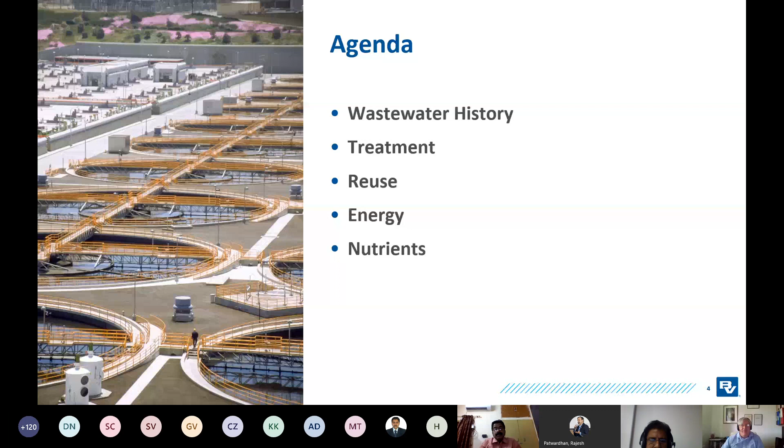So let's start off with that wastewater history. I know this history is biased, I'm telling it from the perspective of somebody sat at his home in the UK. If I was telling this story from America, India, or China, some of the facts I picked up might be a little different, but the fundamental basis would be very much the same. I think the growth of cities and international trade has got an awful lot to answer for in terms of human health. Bringing all those people together in one place is not only good for people, it's good for all the things that like to live off people as well.

In 1831-1832, cholera arrived in the UK on board ships. 32,000 people died in 1831-32, about 13,000 in London. At that time, the population of the UK was about a quarter of what it is now, so that's equivalent to over 120,000 people today - certainly more than the current epidemic.

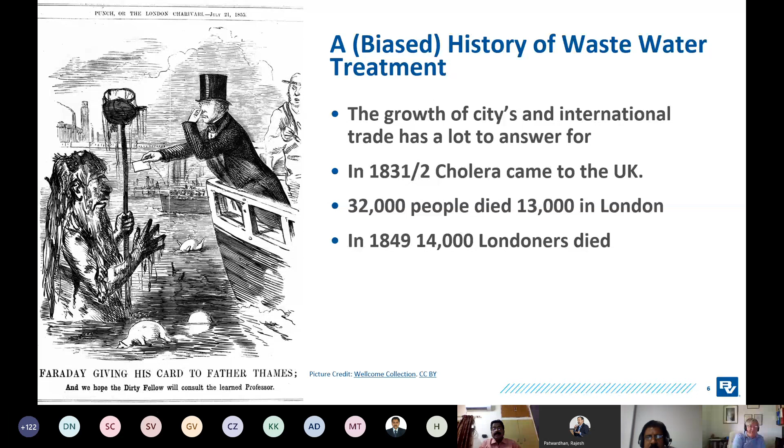Cholera came back again in 1849, and another 14,000 people died. At that time, people really had no idea where something like cholera was coming from. The whole of London stank. When people built the city, they regarded the river as pretty much a convenient place to throw anything they didn't know what to do with, including all the human waste. So we had a dreadful stink, or miasma, arising from it that people thought was what was making them ill.

In 1854, John Snow proved the link between water and cholera in a famous piece of work by looking at a pump in London, proving that all the people who'd become ill around it had drunk from the same water pump.

The first thing done to sort that out was by a guy called Bazalgette, and he solved the problem by building sewers. He built sewers through the centre of London and took the flow of wastewater out to the east of London, built some big tanks, and released it into the Thames on a falling tide, so it was taken out to sea. If any of you've been lucky enough to visit London and walk along the banks of the Thames, along the embankment looking into the river, what you're actually doing is walking along the top of Bazalgette's sewer.

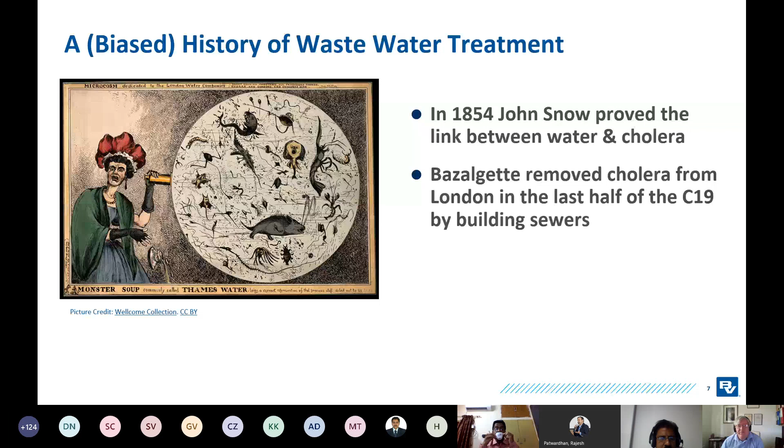So we talked about Bazalgette, who basically moved the stuff away and got rid of it on the falling tide. We moved on from there to start developing treatment. In the late 19th century, we saw the development of percolating filters. The document on the left is something I'm particularly proud of - in my office at work I have a series of original patents by Frank Candy, who was one of the proprietors of one of the companies that ultimately came together to form Black & Veatch. This is a patent for improvement in precipitation tanks and the means of delivering water to filter beds, so a direct link I have back to some of this original treatment work.

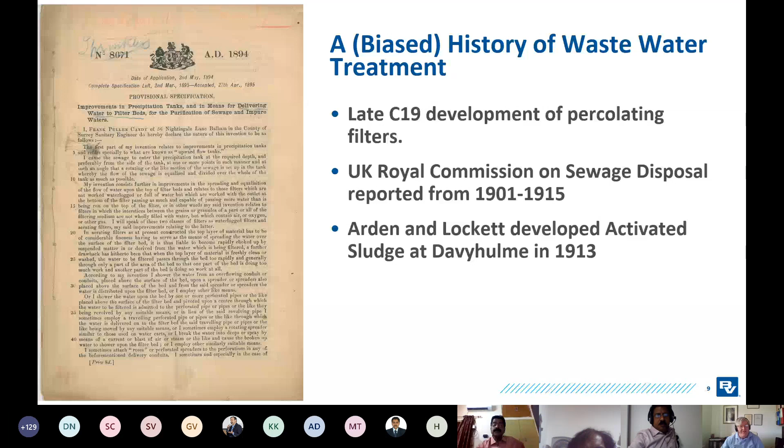At the same time as protecting human health, we've also been protecting the environment.

Moving a bit further forward in time, certainly this event was in my lifetime: the Cuyahoga River Fire of 1969. At that time, this is up in Cleveland, which is in the Rust Belt in the US, and there was a lot of industrial activity, a lot of oil floating on the river, and that occasionally caught fire. In 1969, this caught fire and grabbed national attention. This photograph appeared on the cover of Time magazine in 1969, and this was really part of the pressure that led to the formation of the US EPA and the passing of the Clean Water Act.

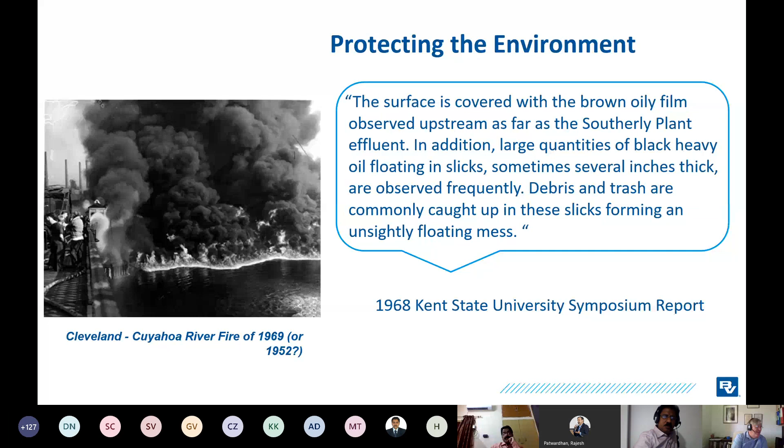One interesting side note on this is we all think fake news is a relatively new event, but when the fire took place in 1969, it was a fairly small event, and the local fire brigade had put it out before any of the press arrived. So some enterprising journalists dug back in the archives and found a photograph of the 1952 river fire, stuck that on the front of Time magazine, and that was what pushed it forward. Whether that's fake news or not, I'll let you decide.

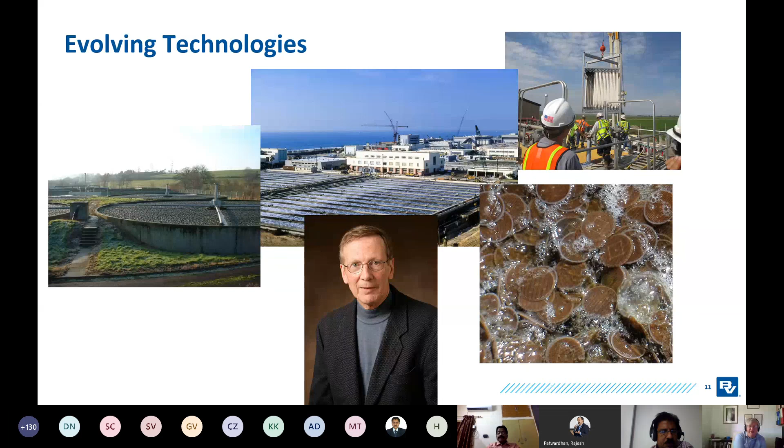So we set the basics nearly 100 years ago, but ever since then we've been evolving the technologies from trickling filters through activated sludge, things like MBRs, MBBRs. And I can't work for Black & Veatch and not also put in a plug for my good friend and colleague James Barnard. James invented biological phosphorus removal probably 50 years ago now. It's become a mainstay of treatment. He's still now 80 years old and still churning out amazing new ideas. A great pillar of our industry.

I thought I'd share with you a couple of recent innovations that Black & Veatch has been pleased to be a part of. The first one is enhanced biological phosphorus removal through sidestream biological phosphorus removal.

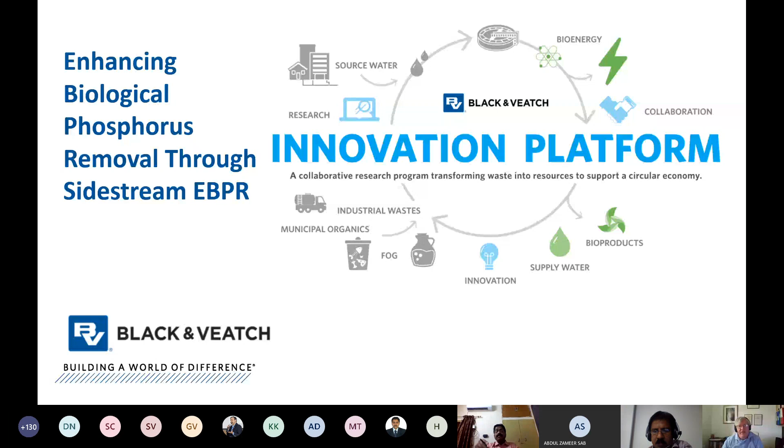Any of you who've been involved in biological phosphorus removal plants will have found that sometimes they work really well, and sometimes they can be really difficult to get going. Over the years we've been looking at this, and we discovered there are influent conditions that make biological phosphorus removal work well, and influent conditions that make it work badly, and that your influent can change over time. So you can have a plant that's working really well, and then you can have an industrial discharger in the catchment who shuts down, stops discharging, reduces the amount of VFA available in the influent, and the quality of your phosphorus removal will decrease. The other thing that's well known about biological phosphorus removal is it can be susceptible to wet weather events, so that if you get a storm event, it can wash your biomass through the system, and it takes quite a while for the plant to recover.

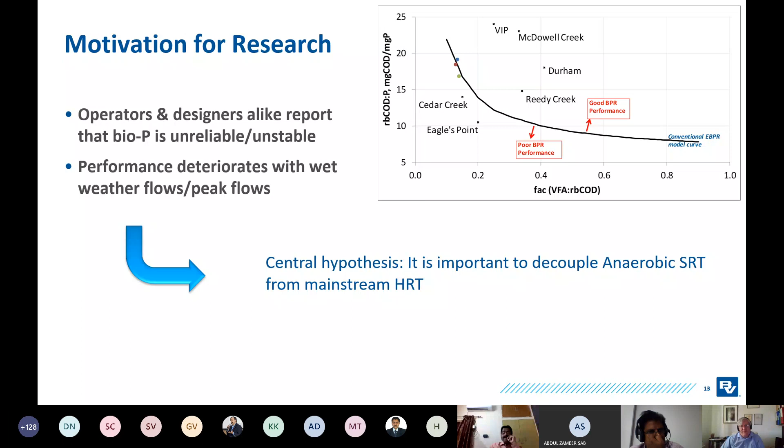So what James has been thinking in recent years is that if you can decouple your anaerobic sludge retention time from the mainstream hydraulic retention time, you get some significant improvements in performance. So the approach we're taking is to enhance fermentation in an anaerobic zone, targeting some really deep anaerobic conditions, ORPs of minus 300 millivolts, and limit the mixing energy. That's proved to be an interesting challenge for engineers who love to put mixers in and keep everything churned up and think they're doing a great job.

And also limit the flow of influent into the anaerobic zone. We've had success with this in really 3 different configurations. The first and simplest approach is to just turn off mixing in one section of a conventional BNR plant, so in one of the anaerobic zones, turn off the mixers for 23 hours a day. We do this, for example, at Henderson in Nevada.

And the plant's use of auxiliary chemical for phosphorus removal stopped almost overnight. The second way of doing it, which allows us to get the benefits of independence from peak flows, is to put a side stream fermenter in. So take a proportion of the flow that's going through the anaerobic zones, put that into a side stream fermenter. Again, deep anaerobic conditions, return that flow. Again, at Cedar Creek, we've done that and seen really good results.

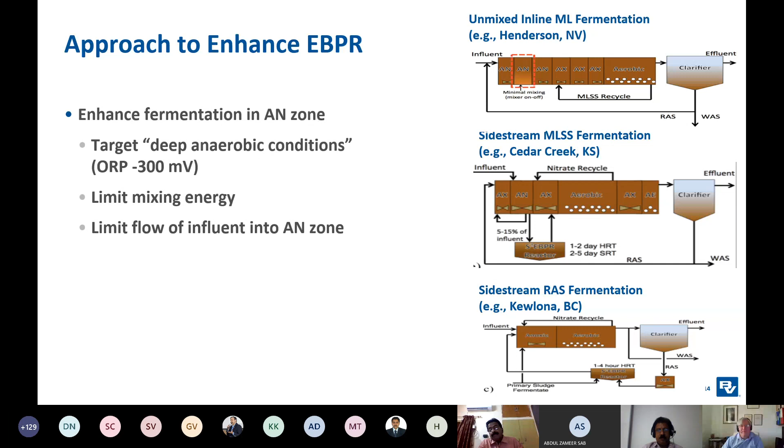So this is great, and we're looking to advance this in the industry, and we're very pleased to say that we're currently working on a Water Research Foundation research project focused on writing some guidelines for how to do this successfully. We've got 21 utilities participating in this work globally. We've got a research equivalent of $1.3 million of effort. This effort was identified by Water Online as one of the top 10 innovations in 2020. And Dr. Leon Downing of Black & Veatch is leading a team of international experts in producing these guidelines.

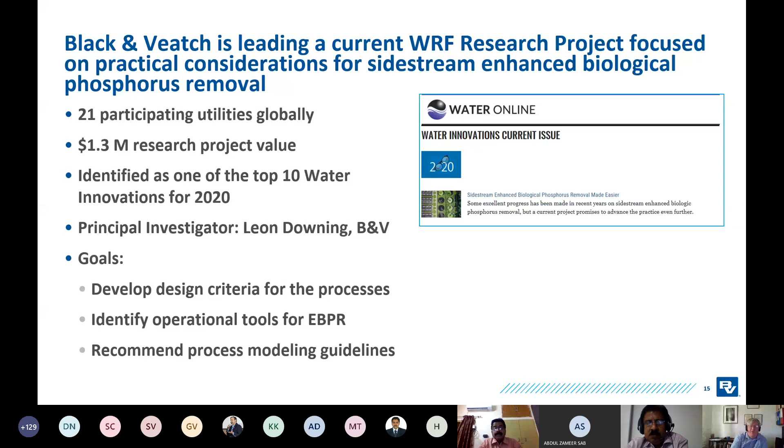So why do we care? Well, because we think that by moving the selective pressure into the side stream reactor and getting these deep anaerobic conditions, we can make a big difference to how we design plants. So for new plants, for example, when we applied this approach at Rock River, the capital that was required to upgrade the plant about halved, so that was a major advantage for that city.

And on conventional treatment plants, you can get much better performance and more stable performance. So Clean Water Services, for example, saw a significant drop in the effluent phosphorus in their plant when they took this approach. And the other big advantage for utilities is the reduction in chemicals. By moving away from having to dose continuously ferric to maintain phosphorus removal, that can be a big saving in operating costs. And also, if you look at the carbon impact of that chemical, it's a reduction in the carbon footprint of treatment as well.

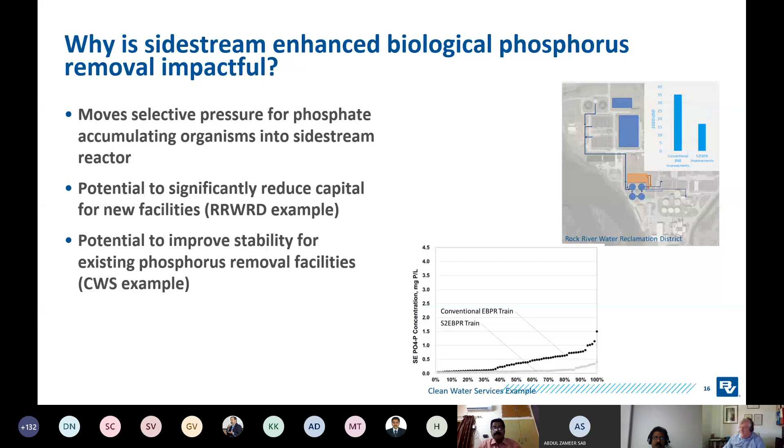Example of a recent plant that we commissioned about 18 months ago, Wakarusa, which is relatively close to our head office in Kansas City. A nice, neat little plant. It's got the fermenter, one of the tanks you can see in the foreground there, and that has run consistently at less than 0.6 milligrams per litre total phosphorus, 0.3 ortho, with no downstream filters after the secondary tanks and no chemical addition. Very nice, neat little plant.

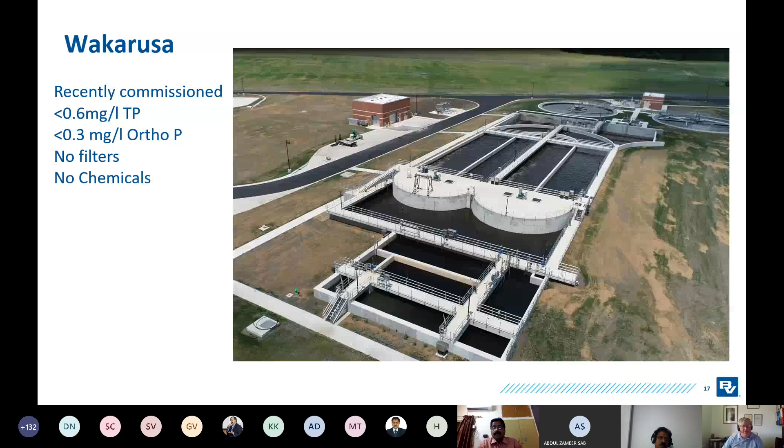The other technology I thought I'd bring to your attention is membrane aerated bioreactors. We in the wastewater industry are great, like so many people, at the 3- and 4-letter acronyms. So MABR, not to be confused with membrane bioreactors, or MBR, or moving bed bioreactors, MBBR. Less complicated. Black & Veatch tries to advance technology like this through something we call the innovation platform, where we bring collaborators in to work together to advance industry knowledge. And this particular piece of work was done with the city of Hayward in California and Suez Environmental.

So what is an MABR? Well, in some ways, the actual material looks quite similar to an MBR. So you've got a series of membranes, either in the form of hollow fibers that look a bit like hair, or in terms of flat sheets. The difference to an MBR is, in an MBR, the water flows through the membrane. So you'll keep the mixed liquor on the outside. The membrane will act as a separation. The water leaves through the membrane.

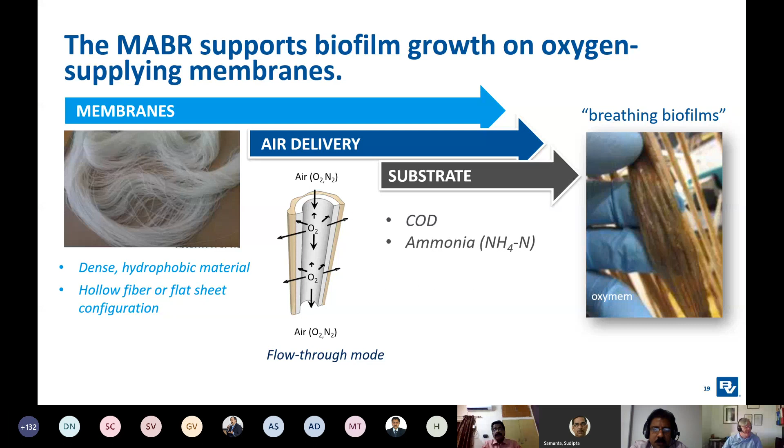So what does the MABR give you? It's a bubbleless aeration device, which means you can get very good control of the air. Just controlling the flow of air into the membrane directly controls the amount of oxygen going into the system.

Because you're not blowing bubbles through a tank, you also don't have the potential to blow VOCs off the top or create foam. And because it's a biofilm technology, you get the advantages of other biofilm technologies: intensified treatment, small footprint,

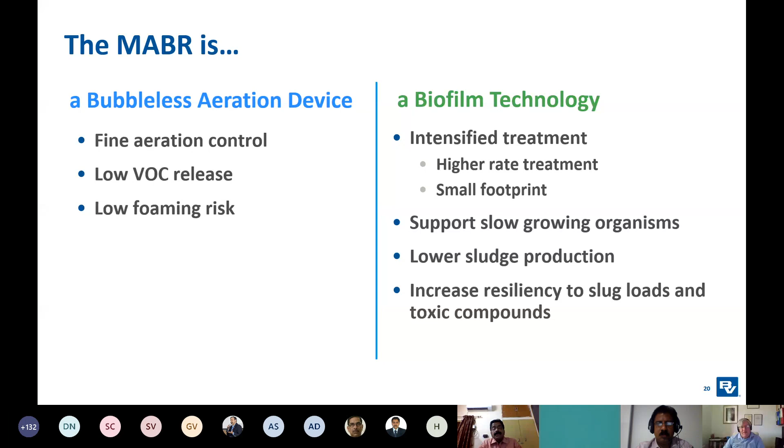lower sludge production, and greater resilience to slug loads or toxic events. Again, what's the proposition? Well, you've got aerobic and anoxic conditions present in the one tank, which means you can actually do all the processes of total nitrogen removal in a single tank. So you can oxidize ammonia to nitrate on the surface of the membrane where there's high levels of oxygen, and then reduce that nitrate back to nitrogen gas further out in the biofilm.

That gives you the ability to potentially retrofit this to existing processes. So we think it's a great solution where you need to get more treatment out of the same tank, and rather than having to build new concrete tanks, can retrofit membrane racks like this and get more capacity. You get better oxygen transfer efficiency, can reduce recycle pumping, and also can potentially avoid having to add a carbon source to get denitrification, which again can be a very big cost and a big carbon impact.

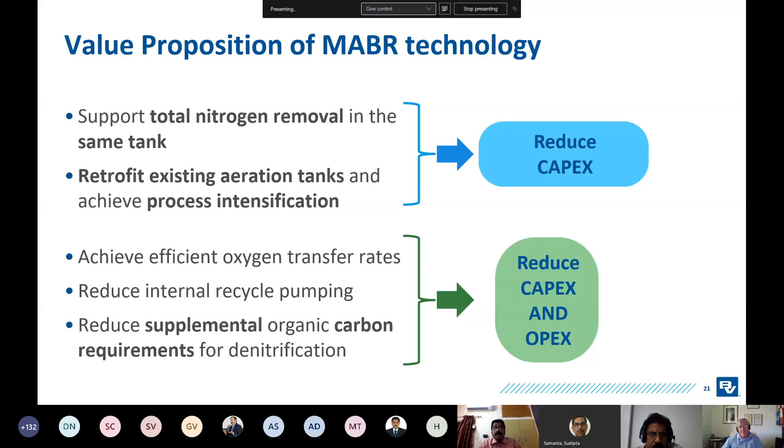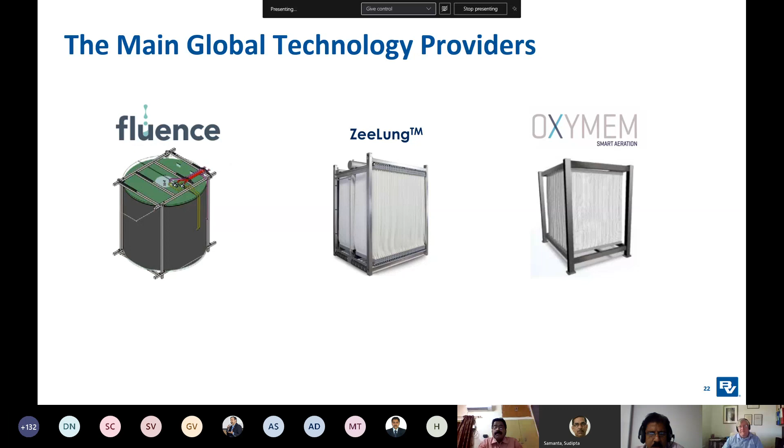We aren't providers of these membranes. There are three main suppliers out there at the moment: Fluence, Suez, which call their product ZeeLung, and Oxymem. We actually worked with Suez and Hayward to demonstrate this at the Hayward facility.

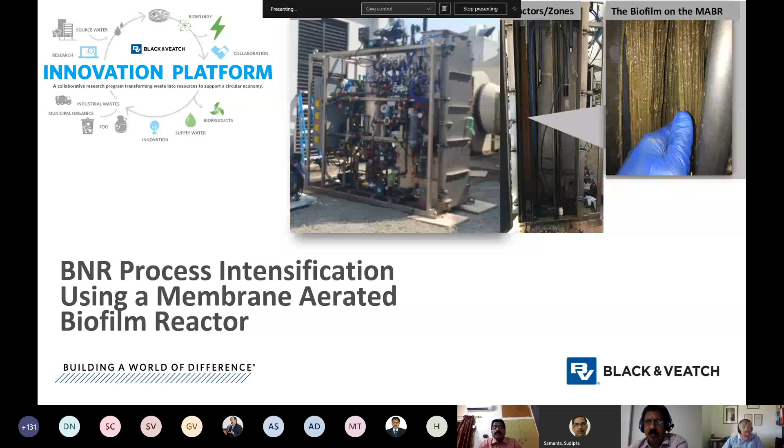And this is the pilot plant you can see in the photograph. The reactors were in the stainless steel box you can see on the right hand side, and the rest of the skid was instrumentation and backup. And you can see the biofilm growing on the membranes in the picture on the right hand side. We opened it up to check it out.

These are some of the results from the pilot testing. So we started off looking at suspended solids retention time of 0.3 days, which is incredibly short compared to conventional treatment. And we got some removal of nitrogen even under those conditions. When we got to 3 days suspended solids retention, which is the sort of point you'd normally not be considering nitrification to take place, we're starting to get significant reductions in both ammonia and total nitrogen, so achieving a pretty high level of treatment.

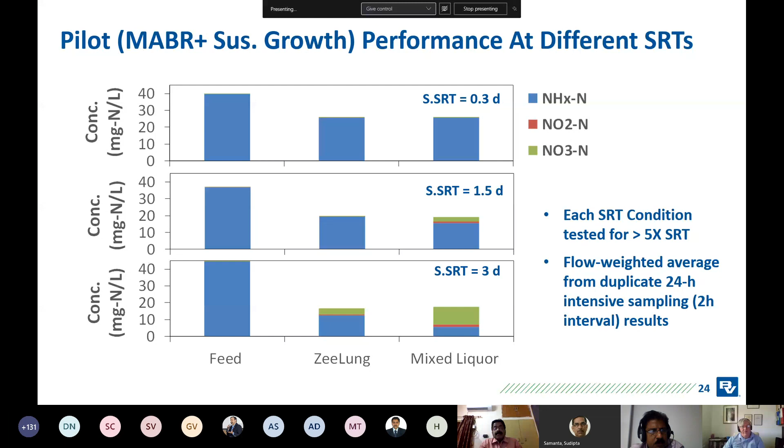We also, having run them at fixed rate, simulated diurnal flows to see what happens. And here you can see that 3-day suspended growth retention time. The top blue line is the incoming ammonia. The orange line at the bottom is the ammonia, which is almost nothing. And you can see the nitrate level, which in this case is pretty much all of your total nitrogen, pushing along at around the 10 level. So a pretty impressive set of treatment at a very short retention time.

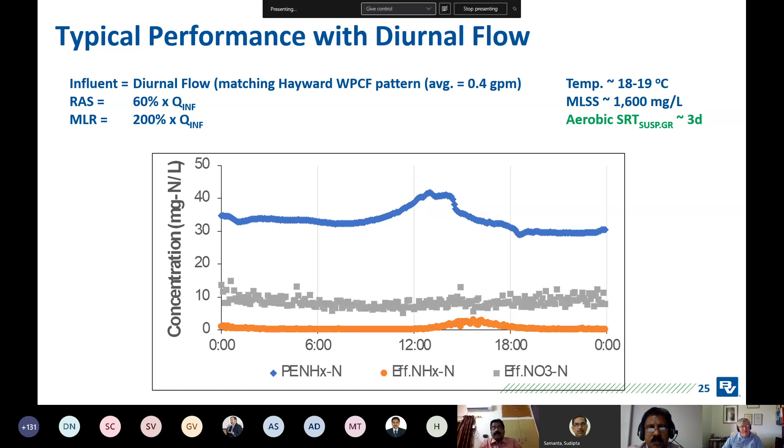And certainly that's a technology we're really excited about and think it's going to make a very big difference.

I guess having talked about the treatment, we should talk about biosolids. I could spend an hour very easily just talking about biosolids, but I'm not going to. I thought I'd just make a few general observations. The first one is we've been making biosolids pretty much as long as we've been treating wastewater. I'd say no sign of them going away.

A lot of the challenge of biosolids is not the material that comes from human waste, it's all of the other stuff that ends up in our sewers. So heavy metal contamination, organic chemical contamination, all of those tend to end up in the biosolids, and we have to consider them for disposal.

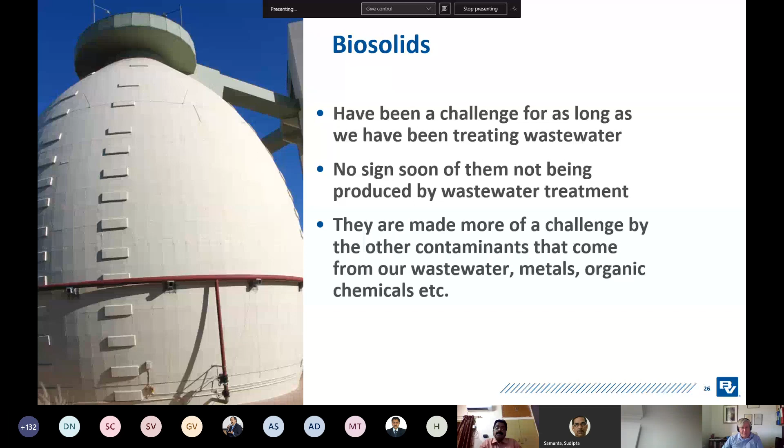There really are only two options for dealing with biosolids. One is to dispose of the organics, and certainly the circular economy approach to that is land application, putting those organics back onto the land as a soil improver. It's also possible to dispose of those organics to landfill, and certainly in the old days we also used to dispose of it via sea dumping, though I'm pleased to say we've pretty much stopped that globally. Normally before the organics are disposed of, they'll be pre-treated through some form of digestion, composting or drying.

The other side, if you don't dispose of it, is to try to destroy the organics. So basically convert the organic compounds to carbon dioxide. There's a number of things used for doing that: incineration, gasification, supercritical wet air oxidation, chemical biological destruction.

Most of those are pretty intensive processes. The one thing you can say about pretty much all of these is that if you try to put a plant in like that, you can get some pretty strong public opposition. And there can be pushback on any of these.

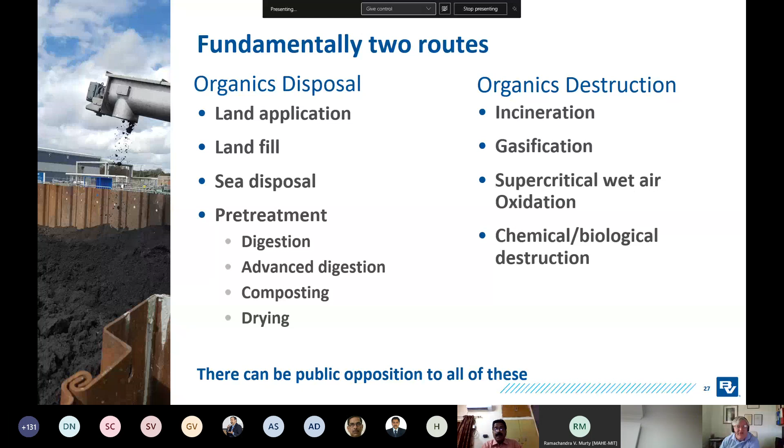My personal solution is that everybody should get an annual delivery - this is your share, do with it as you will. But unless we can manage to do that, which I think is politically totally unacceptable and not really a serious suggestion, we're going to have to find a means of dealing with it. And the challenges keep coming.

We think we've got a new technology or something that gives us a great result. Two of the things in the last probably 12, 18 months I've seen really arising and getting some serious consideration are perfluoroalkyl and polyfluoroalkyl compounds, known as PFAS.

If any of you haven't come across PFAS, this is a byproduct of firefighting foams, non-stick liners, and a whole pile of other modern world compounds, which have been demonstrated to contaminate groundwater in many parts of the world. Started off being typically found around Air Force bases and things like that, where there's a lot of firefighting foam being used, but also now being found elsewhere.

And most recently have been found in biosolids, and there's a big debate in the US at the moment about what's the significance of that and what is the consequence for human health.

The other one we're starting to see quite a lot of attention to is microplastics. Certainly research has now shown there is definitely microplastics in biosolids. There's definitely a buildup of microplastics in soil that's had biosolids applied to it. The real question is, what's the impact?

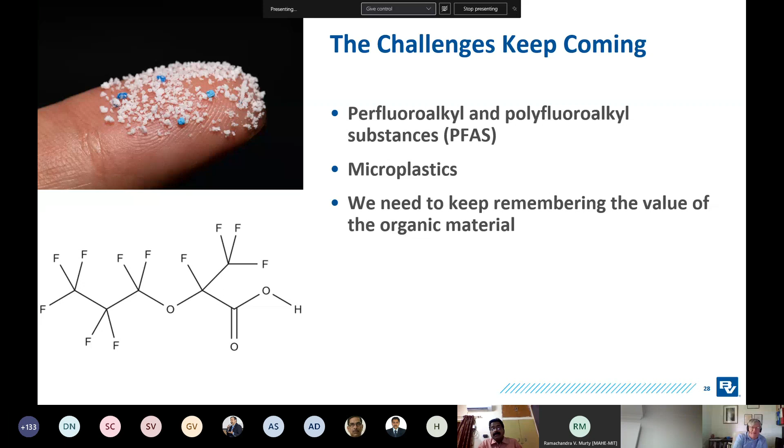As we consider all these things, maybe the easy answer would be, right, let's just go to some form of oxidation and get rid of all this material. But we do need to remember the huge value in the environment of that organic material, and make sure we get a balance between regulating the stuff we need to regulate, but also making sure we keep taking advantage of that material as a soil conditioner where we can.

So let's move on and talk about resource recovery, and probably the first and easiest thing to consider is the water element of that and reuse.

Reuse takes many forms, and despite what we often like to tell ourselves, it's not new. I think anybody who lives on a long river has pretty much got used to the idea that the water that's extracted for drinking has potentially previously been discharged upstream from a treatment plant. There's a very good apocryphal story in the UK, that I'm assured is entirely untrue, that if you drink water in London, it's probably been through 5 people already.

We've been doing irrigation for many years. And more recently, it seems like the world has been standardizing on a reuse scenario that uses MF or UF in front of RO, followed by an advanced oxidation system to produce water of potable quality. There's plenty of examples of that now around the world.

Singapore pretty much led the way with its NEWater systems, lots in the US and elsewhere. And we're certainly seeing with climate change, water scarcity, and the strange desire of people to live in warm, dry areas, that the interest in reuse in its various forms is growing all the time.

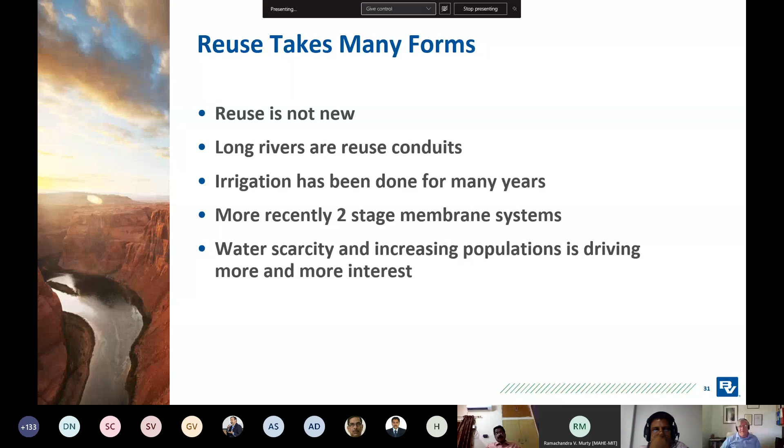I thought rather than talk about the sort of membrane solution, I'd actually just spend a couple of minutes talking about a different approach, which is what can you do if you don't use membranes? This is the approach that Melbourne Water took about 8 years ago now.

Looking to produce 880 mLD of reused water from their Eastern treatment plant in Melbourne. Had that gone down the conventional membrane route, that would have been hugely expensive, so they looked to find an alternative for what at the time, and I suspect still is, the world's largest reuse facility.

They spent a lot of work piloting to prove a solution that used ozone, biological treatment, and UV to achieve the level of protozoa, virus, and bacteria removal that their health regulator was looking for. They did a lot of work on the pilot testing, which Black & Veatch were honoured to help them with, doing challenge testing and demonstrating the capability of this treatment.

It's now producing Class A plus recycled water for potentially use in irrigation and other uses around Melbourne.

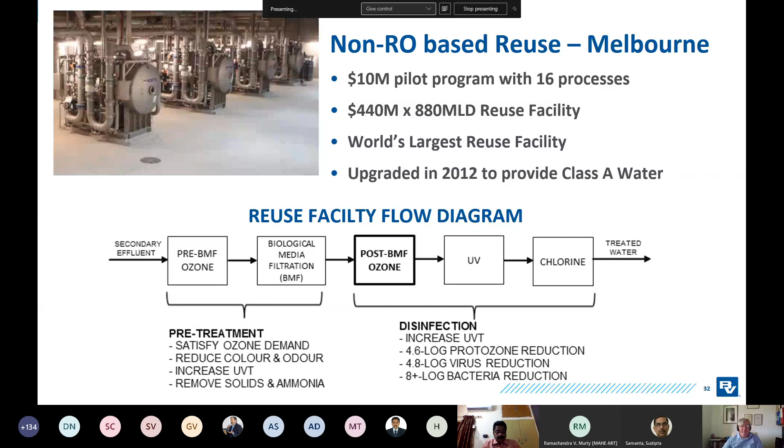So, that's a little bit on the technical side. I think it's also worth thinking about what the barriers to reuse are, and they're certainly substantial.

I think one of the biggest ones is public perception. For very good public health reasons, we have almost an inbuilt concern about wastewater, and it's risky. And when the newspaper headline writers get hold of it, they have a field day. There's lots of opportunities.

An interesting question, particularly if you're going for a dual reticulation system with high quality reused water out, not to be used for drinking, but for toilet flushing, irrigation, things like that, is what you do about the cross connection liability issue. If you've got two pipes, one bright purple if you're in Singapore or whatever else it may be, how do you stop somebody either in their own home or a plumber making a mistake and connecting to the wrong thing?

And who's responsible if a cross connection gets made and somebody gets ill? Is that the utility's problem? Is that the plumber's problem? Is that the homeowner's problem? Until you get that sorted out, I think there'll be a lot of resistance.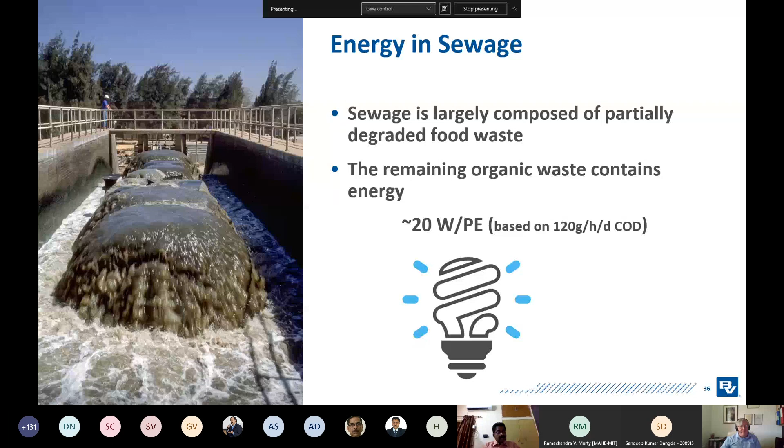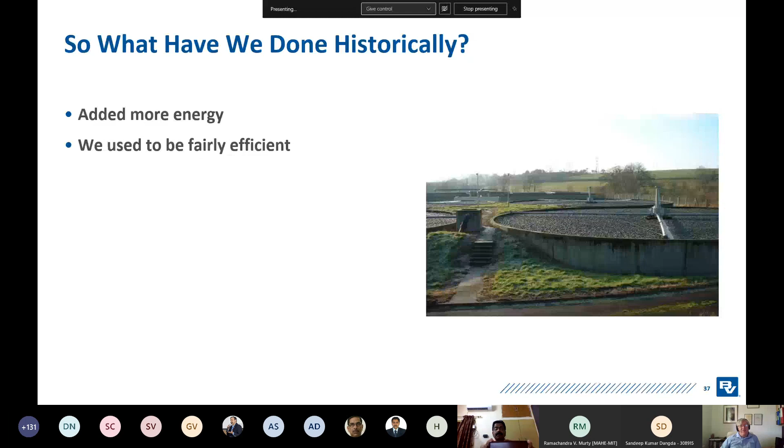But what we've done historically, we've taken that energy, we've added more energy to treat it. We used to be pretty efficient. I've been to trickling filter plants that actually had no power supply to them at all and achieved their treatment without power. As our standards have tightened, we've had to put more energy in, and as we get tighter and tighter standards and more advanced technology, the energy's been tending to increase with things like MBRs and advanced oxidation with UV.

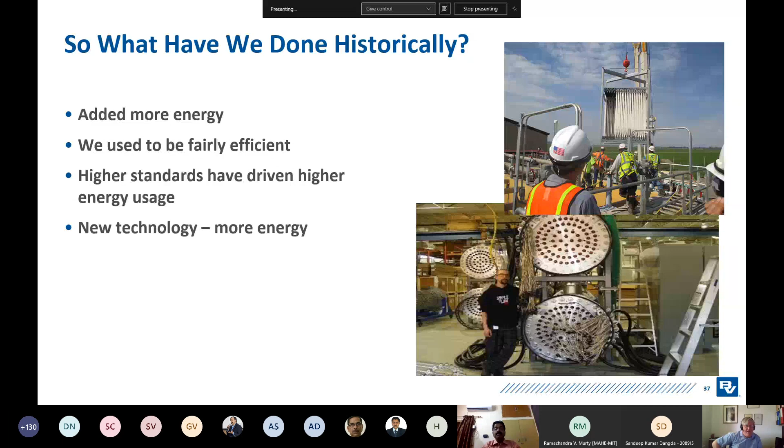So what are we doing to address that and try and get back towards energy neutrality? Anaerobic digestion, which we mentioned earlier, for stabilization is definitely one of the answers. Again, it's been around pretty much since wastewater treatment began. End of the 19th century, people were digesting biosolids.

Hold the sludge at 35 degrees C, about 14 days, and bacteria will break a lot of that material down. As a byproduct of respiration, they'll produce a gas that's a mixture of carbon dioxide and methane. In those early days of digestion, the reason for doing it wasn't for energy, it was to stabilize it. The posh way of saying it is to reduce the vector attraction, but what that really means is reducing the smell and the flies and reducing the nuisance value.

And if you digested this material, it became much more pleasant to deal with, and also reduced the pathogens present in the material, and also reduced the amount of material to dispose of by heading for 50%.

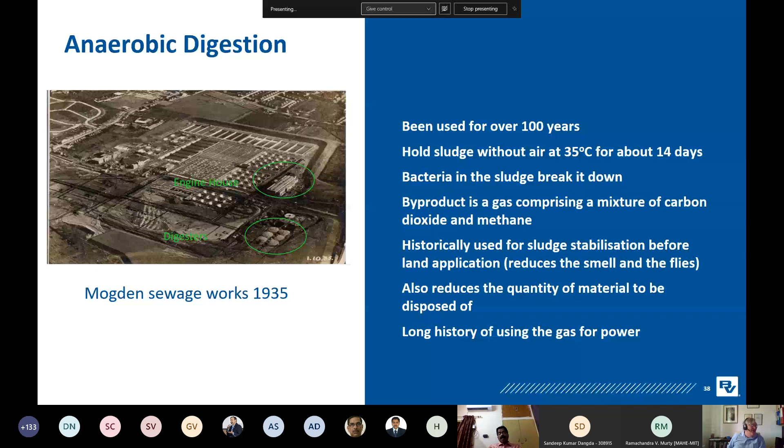The other thing I like about this photo is to note that the treatment plant is surrounded by fields. Since then, a lot of houses have been built around it, and the residents now take great pleasure at complaining about the slightest emission that comes out of the treatment plant, which is fair enough, but I would remind them that the treatment plant was there first.

There's been a lot of interest in the last probably 10, 20 years about how we can improve the quality of that digestion, what it's doing for us.

And one of the ways that people have been looking to do that is through cell lysis.

Cell lysis is pretty much a straightforward process. If you look at sludge produced by a treatment plant, it's a mixture really of a number of things: inert solids, so particles of sand and grit, bacteria that you've grown in the treatment process that have helped you remove the soluble pollutant, remaining pathogens, bacteria that can cause human illness that are still present there, and also quite a lot of EPS or extracellular polymeric substances, which is really the slime the bacteria secrete to help them absorb those pollutant materials and treat them.

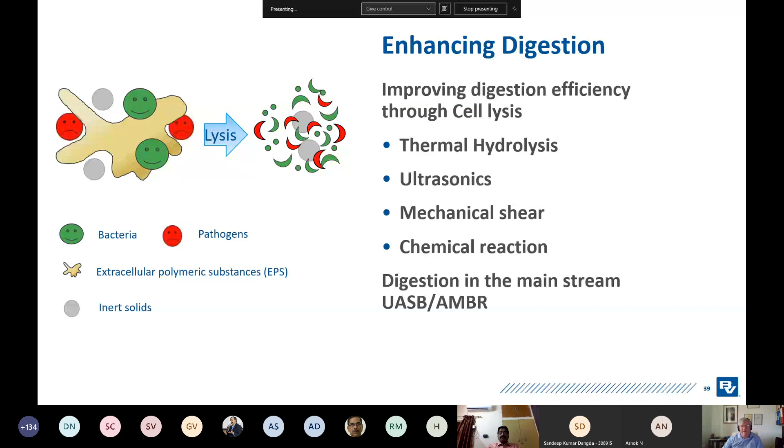We talked a bit about the circular economy and carbon neutrality. I think it's interesting now. We've seen a few plants around the world that have managed to demonstrate they can get to net zero for energy for treatment. But now Australia is starting to regulate and demand that new treatment plants are carbon neutral.

And that standard is looking at both the carbon dioxide used in the energy that's used to treat it, and also things such as methane, greenhouse gas slippage from things like methane that escape from the process.

And the approach really to getting these carbon neutral plants is to look at as efficient a technology as possible for the biological treatment. Some of the things we've talked about today or other low energy treatment options. Get the maximum amount of energy recovered through digestion as possible. And often you will look to see if there's other organic waste you can import to the plant to co-digest with your sludge to increase the energy production, and potentially on-site generation through other renewables.

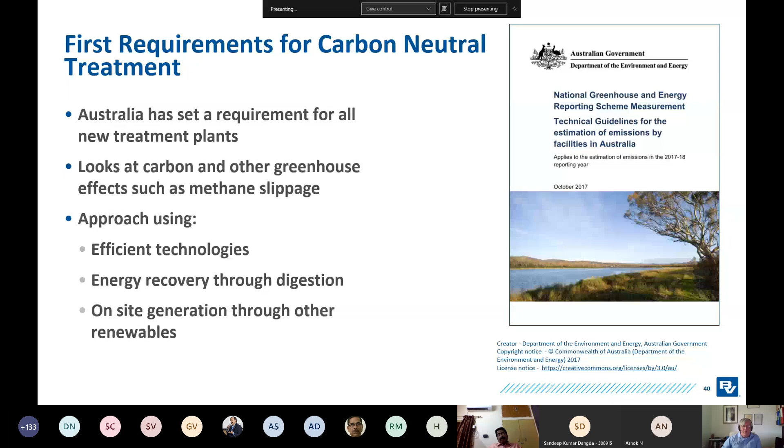And what's the future? Well, maybe there's other ways to use the carbon that's contained in the sewage rather than converting it into methane in anaerobic reactions. Certainly fuel cells are at the development stage, and a number of universities and others are working on how you could potentially get electricity directly out of wastewater treatment.

And something else that I think is quite interesting, and I'm privileged to be on the Industrial Advisory Committee for, is a European research project that's looking at using the energy in wastewater to drive desalination. So the MIDES project for microbial desalination has made some great strides and has now reached the point of building a demonstration plant. If anybody's interested in that, you'll be able to find that on the internet.

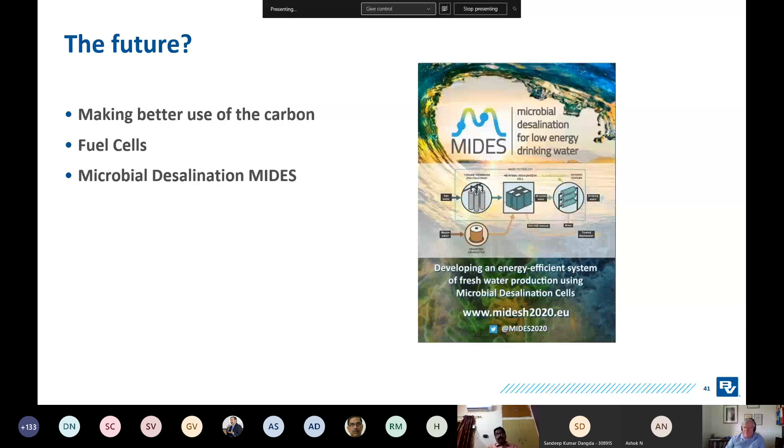So finally, talk a little bit about nutrients. And really, the nutrient I think it's most important to talk about is phosphorus. Nitrogen is a nutrient in sewage, but there is so much nitrogen in the air that really looking to recover nitrogen from sewage at the moment, at least in my view, doesn't make a lot of sense. Whereas phosphorus is a limited resource. There's only a finite amount of phosphorus on the planet.

And when we've used our way through it, we'll be in trouble. At the moment, we're working quite industriously to take the phosphorus from the land and dump it in the sea, where it's going to become very much harder to get at as it washes off from agriculture and gets discharged out of wastewater treatment plants.

Phosphorus recovery is a separate process, normally applied to plants that have biological phosphorus removal and anaerobic digestion. Biological phosphorus removal accumulates phosphorus within the cells doing the treatment, and when you put those in an anaerobic environment, they release that phosphorus back into solution, which in your treatment plant is a real problem because it will just build up until you exceed your effluent requirement. So trying to take it out makes an awful lot of sense.

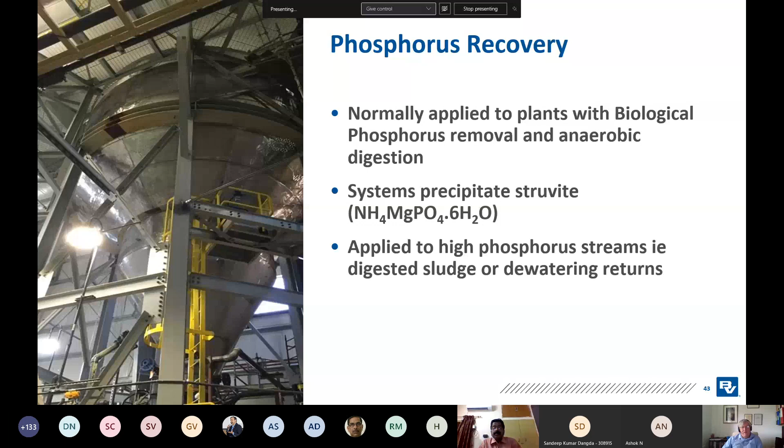Now, there are some interesting things to note about phosphorus. If you've got a biological phosphorus removal plant and you don't take the phosphorus out separately from the sludge, you get an interesting issue when you try to apply it as a fertilizer. If you apply biosolids to the land at the rate crops require for nitrogen, you'll find you're significantly over-applying the phosphorus. Depending on whether it's aerobic or anaerobic, the stabilization affects the number, but many times more phosphorus is applied than you need.

So when you increase the phosphorus loading in the soil, you tend to get wash-off of that material. It can wash into the rivers and lead to eutrophication of rivers, lakes, or bays. It's interesting, if you look around a number of major cities, you'll find that so much biosolids has been applied that they now have pretty much a total moratorium on applying biosolids because of the phosphorus load that's been applied, while they wait for that to get worked out.

If you separate that phosphorus off on a struvite harvesting plant, you can get a much more balanced fertilizer, because you don't want to be applying material at a phosphorus-limited rate, since you'll need a much bigger land bank. You'll also find farmers aren't that keen on the material because they're getting very little nitrogen benefit, and they have to separately apply nitrogen to the field as well.

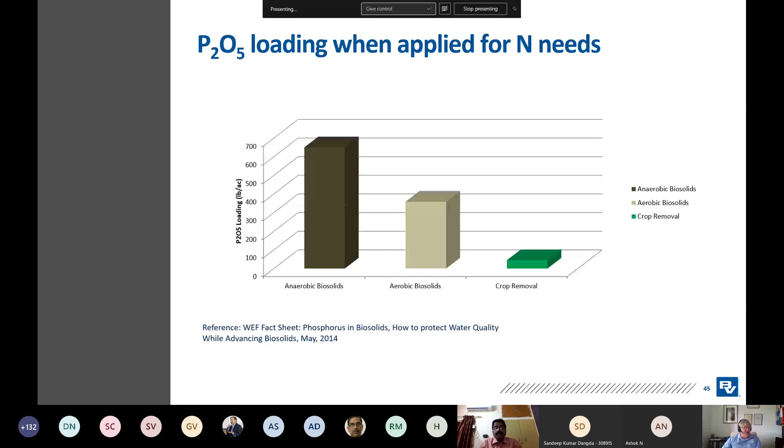Hello. And the other thing I hadn't realized until fairly recently — I think you would have. Sorry?

What I hadn't realized until fairly recently was the continental movement of phosphorus. We tend to produce food in the agricultural areas in the center of continents, while a lot of the cities are on the coast. People will pay to move the high-value food out to the cities, but nobody wants to pay to ship sludge back again. So we're actually moving the phosphorus balance around our continents.

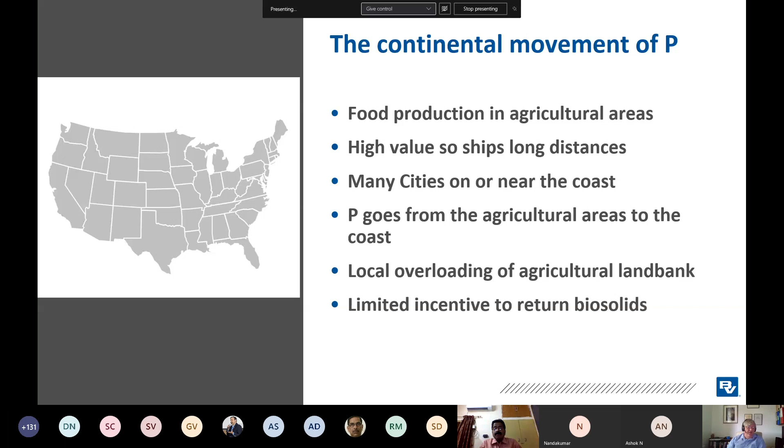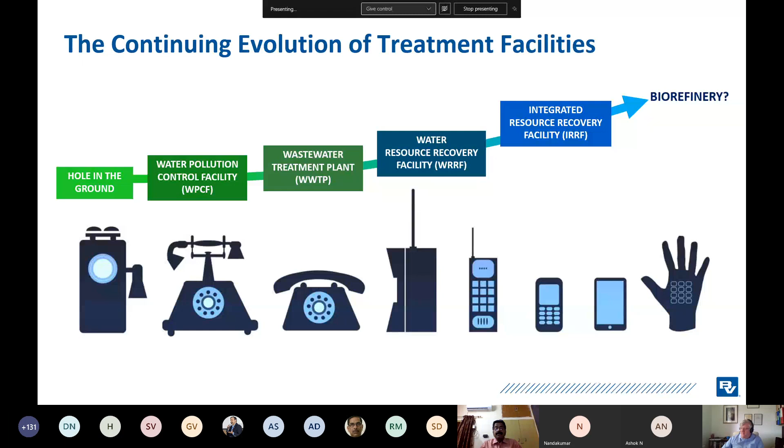So that's it. Hopefully we've had some look at how wastewater treatment has evolved from the hand crank on the wall you saw in old movies to the handheld devices today. We've seen something of the evolution of wastewater treatment from really a problem to the modern integrated resource recovery facility, and potentially the biorefinery of the future. I hope that was interesting. Thank you for your attention, and if anybody's got any questions, I'll see if I can answer them.